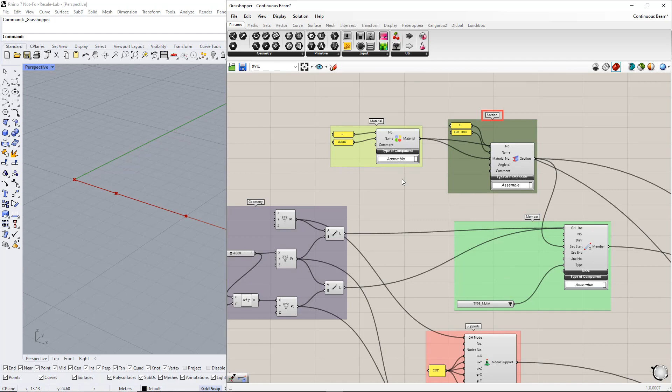Our first example will be about a continuous beam, divided into 2 videos. In the first video, we will create the geometry, members, cross-section and material, and assign supports. In the second video, we will create static analysis settings, load cases, design situations, and load combinations. Afterwards, we will apply the load on the members.

In order to follow our online course, you need to install the Dlubal plugin for Rhino and Grasshopper. You can find it in the Dlubal folder under Tools. Double-click on the file to run the installation.

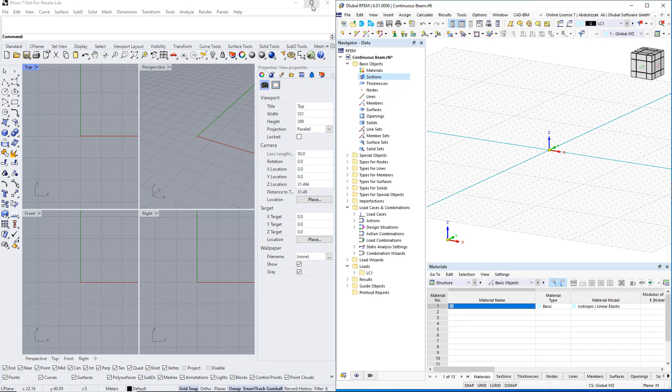After completion of the process, start Rhino Grasshopper and RFEM. First, we will show you some information about Rhino Grasshopper. When we start Rhino, we have 4 default viewports: top, front, right, and perspective view.

To rotate the perspective view, hold down the right mouse button. You can zoom in or out by scrolling. You can pan by holding down the mouse wheel. For other views, you can pan by holding down the right mouse button.

To minimize or maximize a viewport, you can double-click on the Name tab. You can also change the viewport from the Viewport tab here. You can change the display mode of a viewport, as well as many other settings, by clicking the Name tab, as you can see.

To launch Grasshopper, type Grasshopper into the Rhino command line, or use the command Launch Grasshopper in the Standard tab in Rhino.

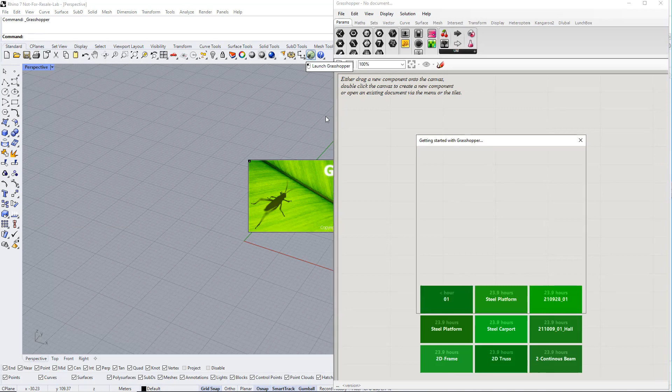The Grasshopper window will appear on the Rhino viewports. You can divide the screen into 2 parts by holding the Windows key and pressing the left or right arrow key. We will display more information and features during the course.

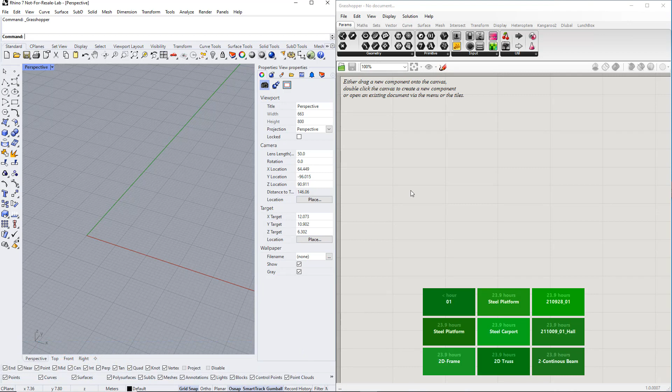Now we will begin with the geometry. First, we will create a point using the Construct Point component. You can find this component in the Vector tab. Then drag and drop it from the Vector tab onto the canvas.

You can also create a construct point by double-clicking the canvas and writing Construct Point. By default, the coordinates of the first point are 0, 0, 0. You can read any information in a component using the command panel, which can be found in the Params tab, as you can see.

Afterwards, we will copy it twice using Ctrl+C and Ctrl+V, or by holding the Alt key and dragging the component.

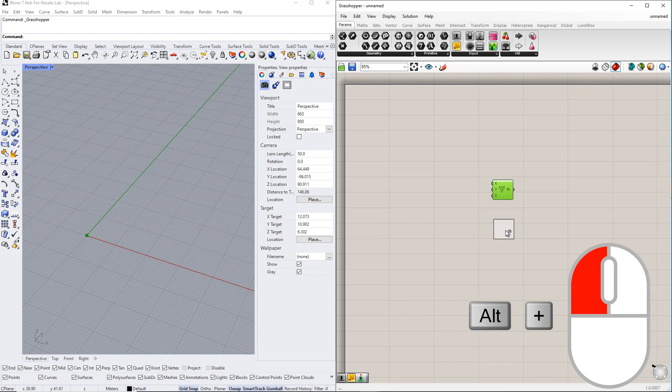For the second point, we will assign a number slider to the x-coordinate, so that it can be easily adjusted later with the slider. You can find it in the Params tab using drag and drop, or by double-clicking the canvas and writing number slider, as you can see.

For example, we will create a range by double-clicking the slider. The lower limit is 0 and the upper limit is 10. You can also enter the slider name. To do this, we enter 'first span', or set the rounding by selecting any type you want.

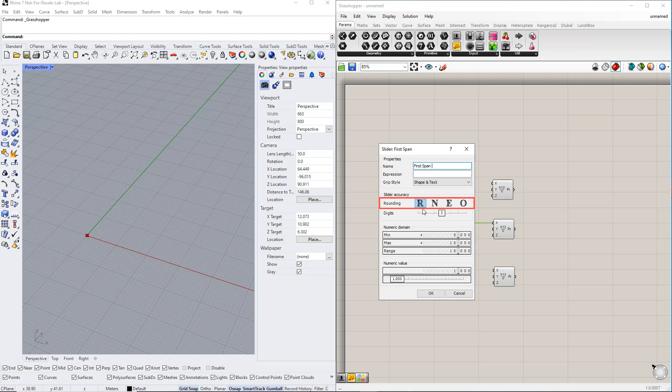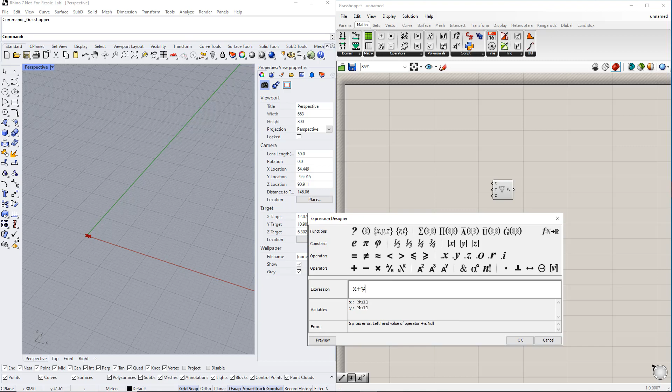For the third point, we will insert the expression component to define a parametric equation between the first and second spans. You can find this component in the Maths tab under Script. Double-click the expression component to open the expression designer and change the expression to x plus y, where x is the first span length and y is the second span length.

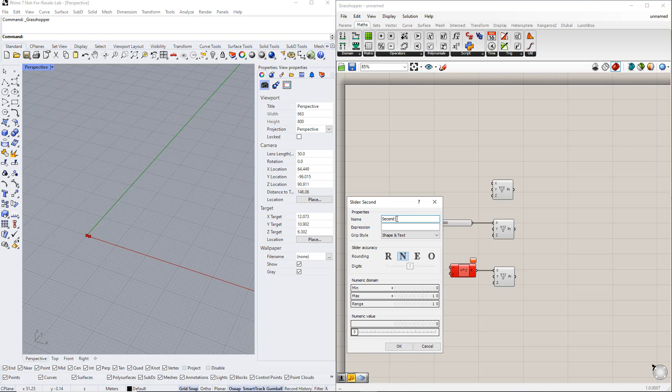You can create a range for y, either with a number slider command or by double-clicking the canvas and writing the lower limit, 0, then less than, and the upper limit. We enter 10 for the upper limit. You can click the plus sign to add an input, or the minus sign to remove an input.

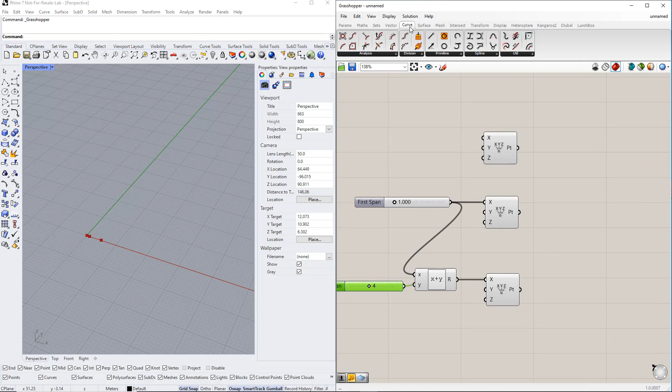Now we connect X and Y to the expression component. In the next step, we will create lines between these points using the line component in the Curve tab. We use drag and drop, or we double-click on the canvas, write line, and select the respective line. In our example, we select the line which has a start and an end, as you can see.

Afterwards, we connect the start and end points of each line to the line component.

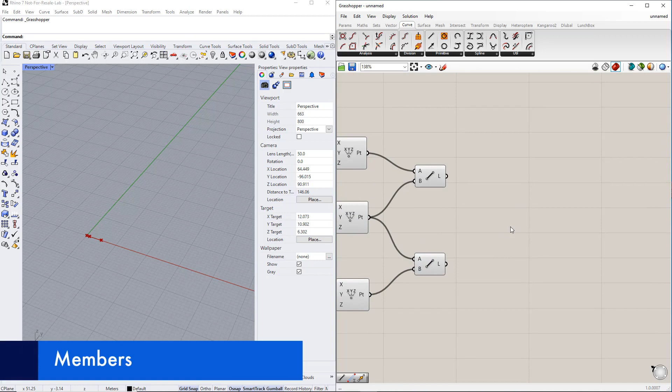To create a member for RFEM, we insert the Dlubal component titled Member. You can find it in the Dlubal tab.

Here, we can also define the member type using the ValueList command with drag and drop, which is also in the Params tab. We can also double-click the canvas and write ValueList. For this example, we select the beam type.

Now, we connect the line components to the Grasshopper line in the member component. By default, a new connection will erase existing connections. Hold down the Shift key while dragging the connection wires to define multiple sources. The cursor will turn green to indicate the addition behavior.

You can disconnect wires by holding down Ctrl and dragging, or by right-clicking the connection and selecting Disconnect. As you can see, when we hover over an item, the wire will be highlighted in red.

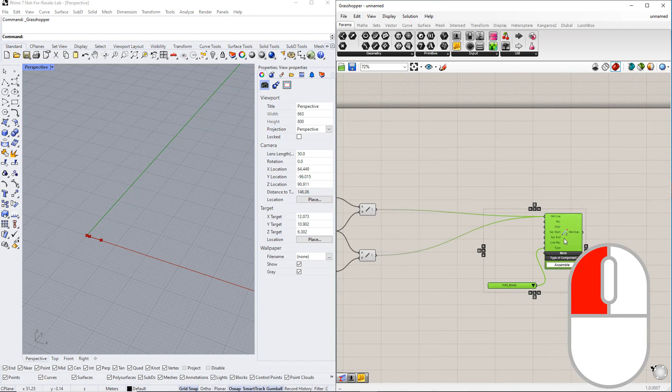Next, we will define a cross-section as well as material. For that, we will insert the Dlubal components, section, and material. You can also find them in the Dlubal tab. To enter the properties of the section and material, we use the panel command.

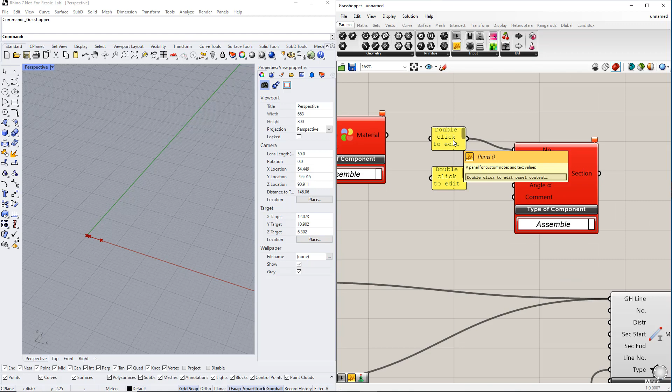Now we enter the numbers and names. For cross-section, we enter 1 as the section number and IPE 300 as the cross-section name. For material, we enter 1 as the material number and S235 as the material name.

Make sure that you use the correct RFEM terminology. Only then is it possible to export the elements correctly to RFEM. Afterwards, we connect the material component to the material number in the section component and connect the section component to the section start in the member component.

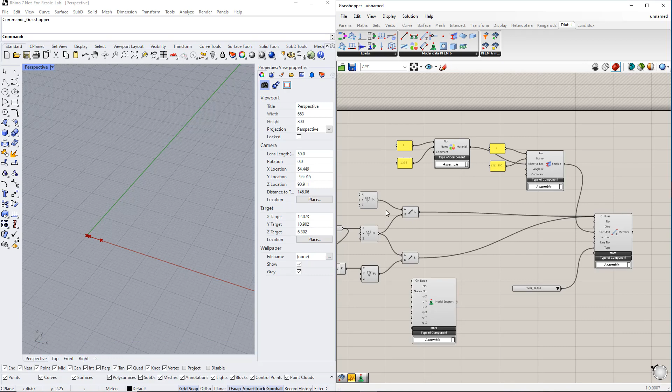In the next step, we want to define the supports. To do this, we insert the nodal support component, which is in the Dlubal tab. For the first node, we want to assign a hinge support. This can be defined by using the panel command.

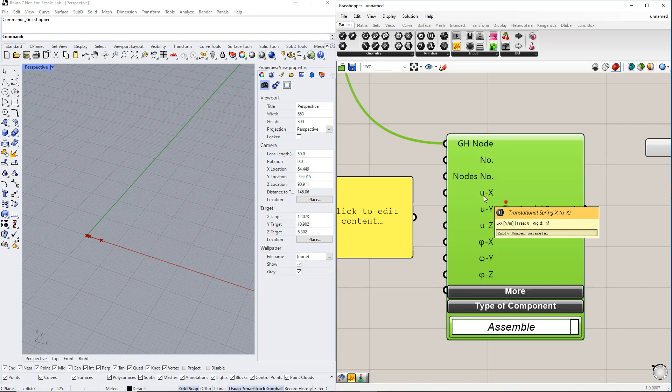As you can see, 0 means free, infinity (INF) means rigid, and every specific number in between means spring. Then, we connect this panel to the respective support conditions.

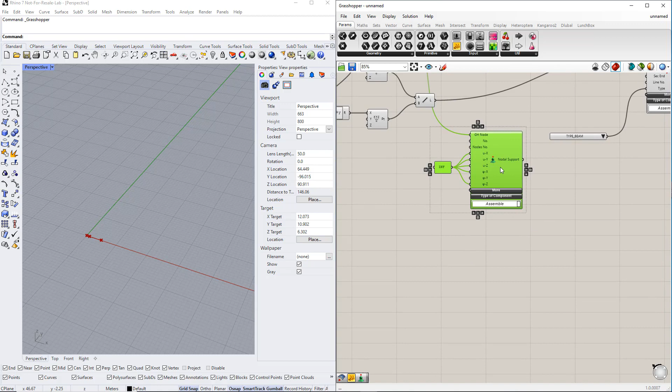We repeat the same procedure for the second and third supports, but with other conditions, because we want to define sliding supports.

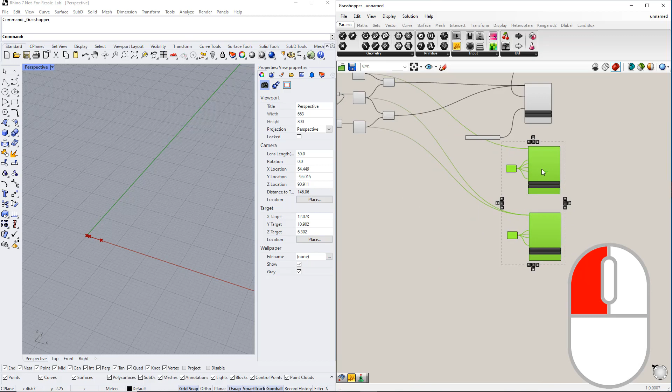To transfer this model data to RFEM, we have to insert the Dlubal component, RFEM6 export component. We also have to activate Web Services, which is in the Options tab, in RFEM 6, and start the server automatically with the application.

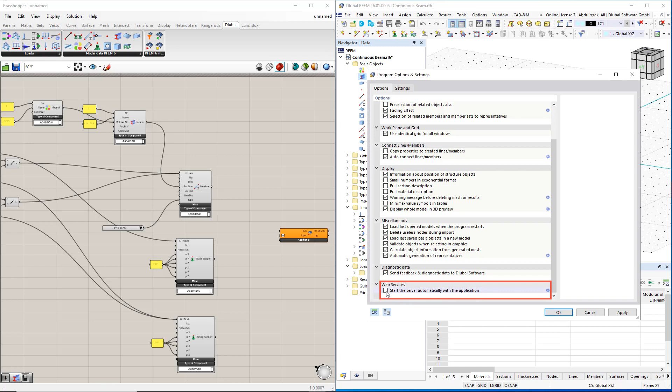To start the export, we use either the button or the Boolean toggle command in the Params tab. For this example, we want to use the Boolean toggle command.

We can also select units using the value list command. For this example, we select meters.

In addition, we can overwrite the previous data in RFEM using the Boolean toggle command. That means all data in RFEM will be deleted before the export, once we switch to true.

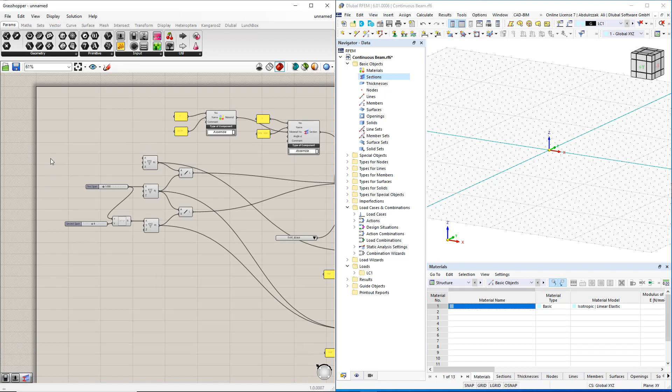To make the work easier, we will make groups, for example, a group for geometry, member, and so on. We can create a group by typing Ctrl+G with the desired component selected.

To edit the name and appearance of the group, we right-click anywhere on the group. Here, we can enter the name of these groups, for example, geometry, supports, etc.

We can also change many options, such as outline type, add to group, remove from group, or change group color, as you can see.

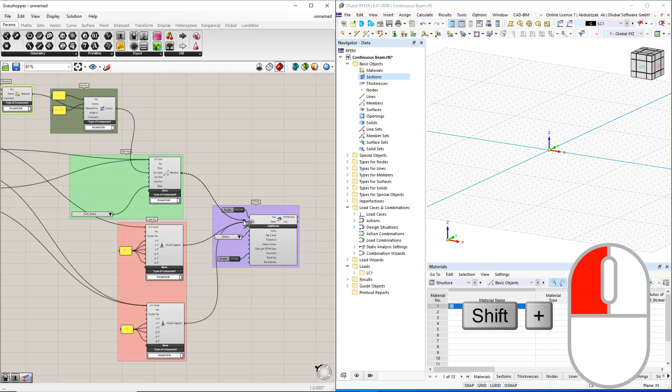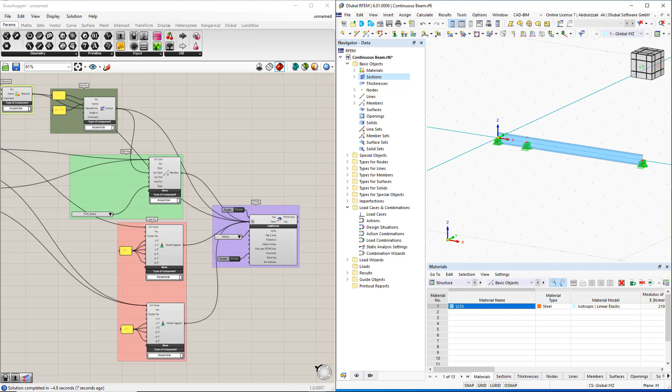After connecting all the components to the RFEM 6 component, we double-click the Boolean toggle command to perform the export. All changes to the parameters in Grasshopper now have a direct impact on the RFEM model.

In the next video, we will learn how to create static analysis settings, load cases, design situations, and load combinations, and apply the load on members.